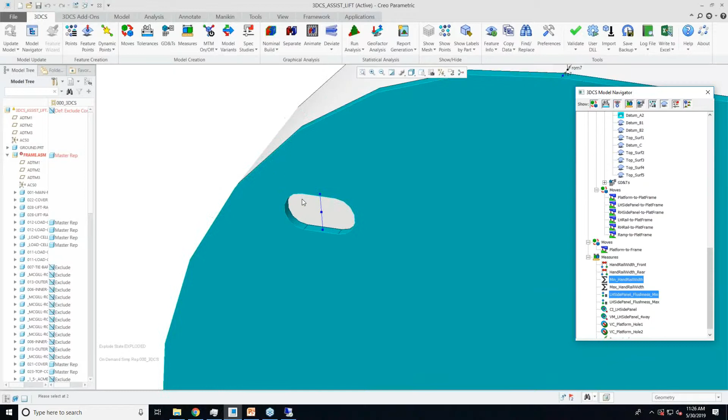All right, so that is the 2-point list measure. So now we've checked our flushness for our side panel. But one other thing about this side panel is it's got a nice 4-way control right here, nice tight hold to a bolt. And then if I go over here, I've got a slot going to a bolt in here, which is hidden. But we also have a lot of these clearance holes going around.

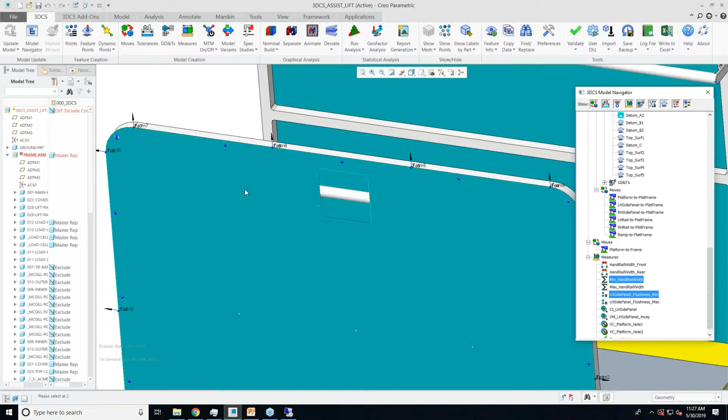And with how I envision my assist lift being assembled, I'm picturing that my assembler, to make his or her life easy, can just screw in and torque down this one over here and this one over here, and then worry about just sliding all these in real quick later. So I want to make sure that if he or she torques down these 2 bolts, they'll have enough clearance to make sure that an M6 bolt can get through these holes. So that's going to be our next objective with this analysis here.

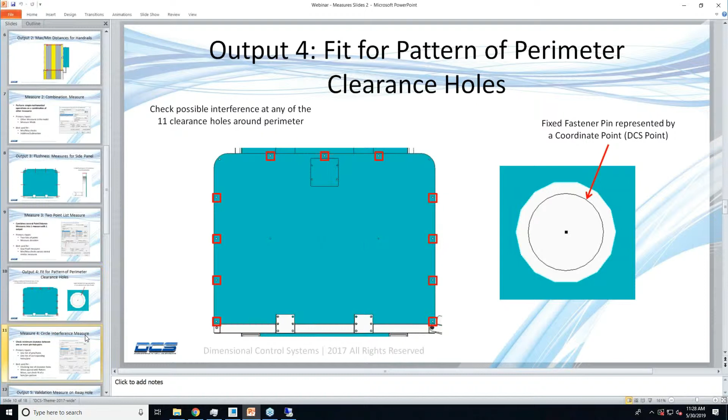So our output number 4, I want to check my pattern of perimeter clearance holes, to make sure there is enough clearance such that my M6 bolt is going to be able to fit through without adding any locating effect to my side panel here. So to do that, I'm going to use what's called a circle interference measure. And this is, I find, an incredibly common measure in 3DCS. I'm using this one all the time. And its best use is checking the minimum clearance between 1 or more pin and hole pairs.

So much like the 2-point list measure, I'm taking a list of object points and a list of target points. Again, they have to match exactly. And again, I want these to correspond across. I don't want these to cross at all, or else it's measuring from pin 1 to hole 2, and pin 1's probably not going to get into hole 2. It's probably not how this is going to work out.

So my primary inputs are just one list of the pins and holes, and then a second list of the corresponding holes or pins. And these are going to be best used for checking the size of clearance holes. And when paired with the pattern move, it can actually check where the pattern move is kind of falling out of spec, where it's having a tough time solving. In this case, I did not pair it with a pattern move because, as I mentioned, I don't want these pins and holes to be doing any locating. I want my 4-way and my 2-way doing the locating.

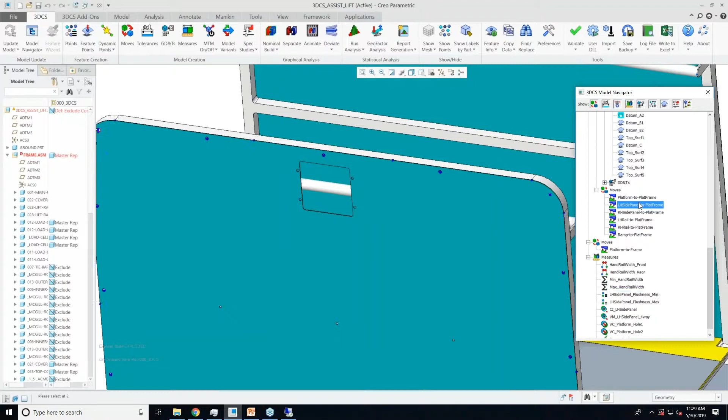So in this case, I have my side panel moving to my platform, only using my 4-way over here. You can see I've got those 2 arrows over there. Then I have the 1 down arrow over here representing my 2-way. But now I want to check all of those other holes that I have in here to make sure those fit.

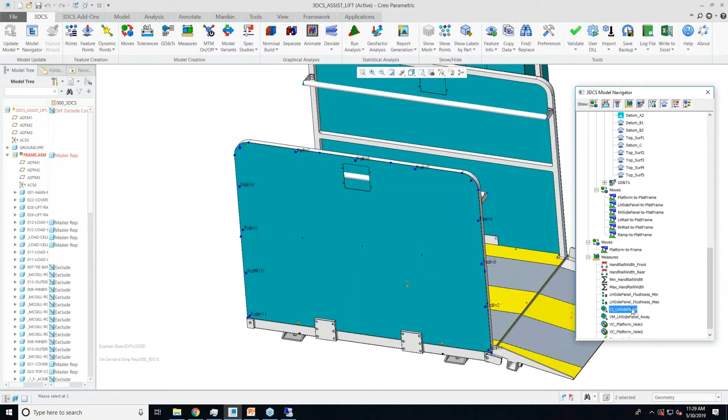So I've added a circle interference measure. And when I highlight that one, you'll see that all those points are highlighting, and it's telling me I'm measuring from this one to this one. So I have a from 2, 2, 2, from 3, 3, 3, and that's what all those letters are saying. That might be kind of challenging to read. So for this measure again, it takes a group of objects here and then a corresponding group of targets.

And one important note is it doesn't matter if you put your hole in object or pin in object, as long as the corresponding thing across from it is going to be that corresponding hole or pin. So I've got to have all pins over here and all holes over here, or all holes over here and all pins over here. I'm pretty sure you could even mix and match them. I wouldn't recommend that. That sounds like a bookkeeping nightmare. But you could if you wanted to. The measure is going to allow you to do that.

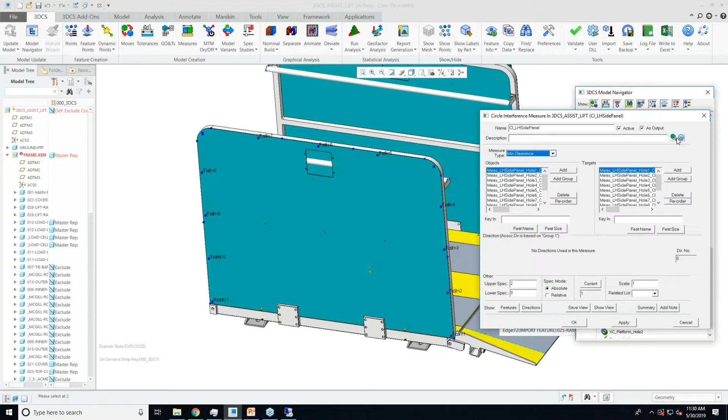And so the most common type you're going to use for measure type is going to be min clearance. Similarly, we do have other options here. Max clearance is going to return to you, it's not a maximum value of clearance that you're seeing between one pin and one hole. It's like, I'll just go to the help manual and that'll give us an image of what I'm talking about here.

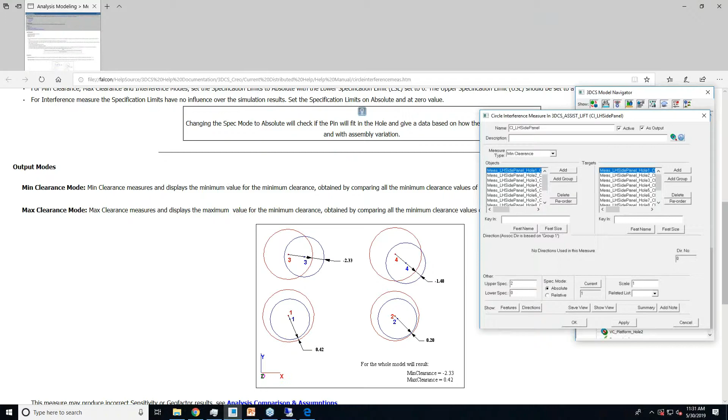So it's interesting, you did just cover something that I wanted to mention: in all of our measurements, you hit the button, I couldn't see it. Yes. But every dialog box has a button that will go directly to that area in the help. And so that's what he did. So for this circle interference measure, I clicked on this button right here, which has a little help icon as well as a circle interference measure icon. If you're in CATIA, it's not going to have this little question mark here. It's only going to have this icon right here, but it's going to be in the same spot in this MTM.

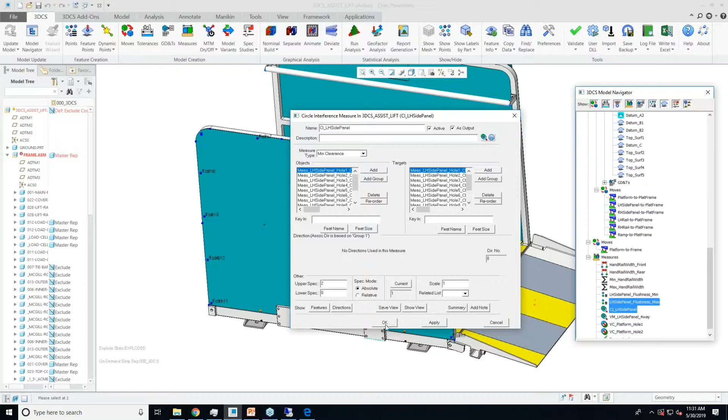If I click OK on this one, I can go to the point distance one. See, same spot, same icon idea. So if you just click on that for any of your Moves, MTMs, tolerances, or measures, it'll take you right to it.

And so then in the help file, I have this image here, which is best used to explain what max clearance mode is. So for each of my pin-hole pairs, 3DCS is measuring the minimum clearance between those two. So for pin 1, hole 1, I have 0.42 millimeters of clearance. For pin 3, hole 3, I have 2.33 millimeters of interference, so negative clearance.

What the min clearance option is going to give you is the minimum number that it saw for all of your pairs here, and what max clearance is going to tell you is the maximum number that it saw for each of your pairs here. So, and this is one build that you're looking at. Yeah, exactly. So it's going to do that every build. This particular build, the max clearance is the 0.42, and the min clearance is the interference.

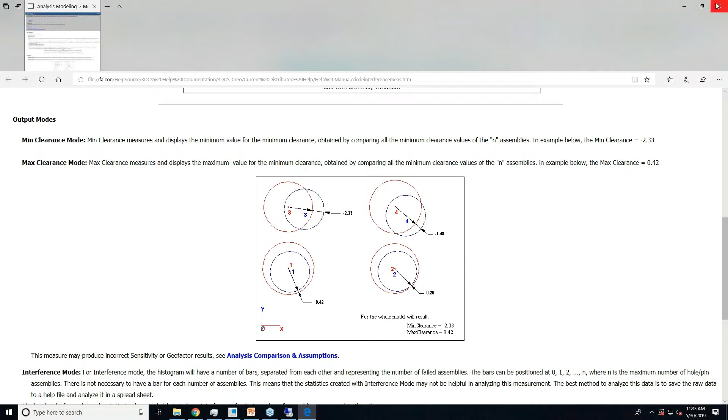Yep. So it's not returning to you any of these like max clearances. Like if you wanted to say, well, I've got my min clearance over here, what's my maximum clearance, to be kind of the opposite of it. Okay. So use kind of the opposite of it. But so that's what the max clearance mode is, and we're going to go back to our model right now.

And so that's the circular interference measure. If I go ahead and I build this, and once again we have this current button. So at nominal, I have 1 millimeter of clearance between that pin when that pin is centered in that hole. But if I start deviating, we'll see this number is never going to get greater than 1, because there's always going to be somewhere where the pin is shifted such that there's going to be a less than nominal clearance. And sometimes I'm even seeing that I have some interference here.

So if I ran my analysis, I could find out how much interference I'm seeing, and could either change the positional tolerance or change the nominal clearance hole size to get rid of this interference I'm seeing, since this is out of spec. And it's key to note that, if you saw from the help picture, this is a radial measurement. So if you get an interference of 0.2, to solve that, you would have to make your hole bigger by 0.4. Yep. Diametrically. Yep.

And I guess last thing to point out here is whenever you're using the circular interference measure and you're checking for interference, just make sure you change your spec mode to absolute and set your lower spec to be 0. Upper spec isn't too concerning at that point, because you can never have too much minimum clearance between a pin and a hole unless you're trying to figure out what size washer to use. And this is a common error that you don't get until you run your results.

So we were even talking, and it might be in our database, to try to change the default for circular interference and virtual condition to absolute. Actually, for all measures, the default should be absolute, because if a measure is referenced in another measure or move or tolerance, you want those spec limits to be absolute. That's probably why your in-spec wasn't working earlier.

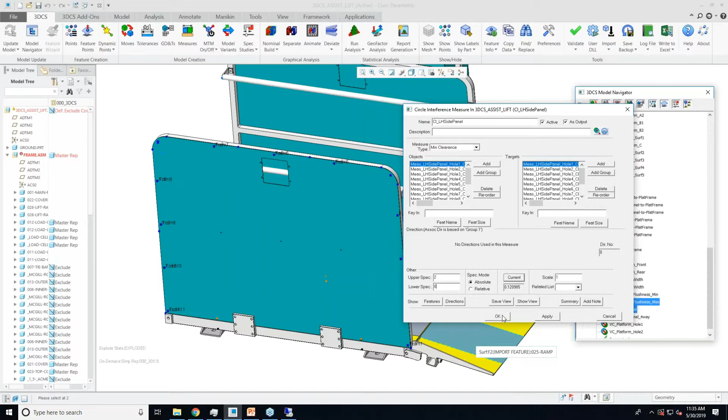Yeah. So if you're doing a simple model where each measure stands by itself, relative is fine. But if you're using the combination measure or measure equation, or if you're referencing a measure in the conditional logic or interference logic fields of a move, you want that spec limit to be absolute.

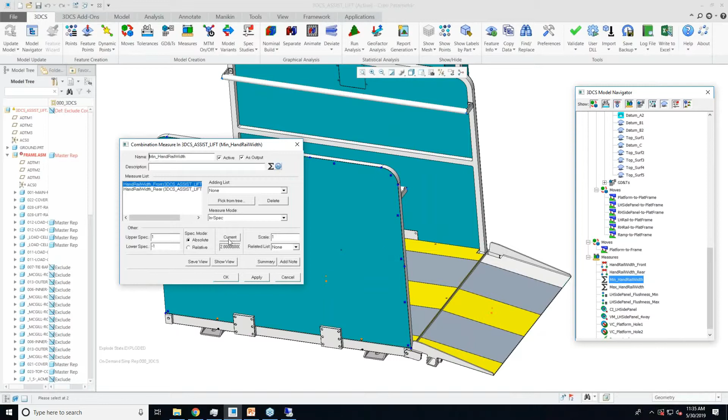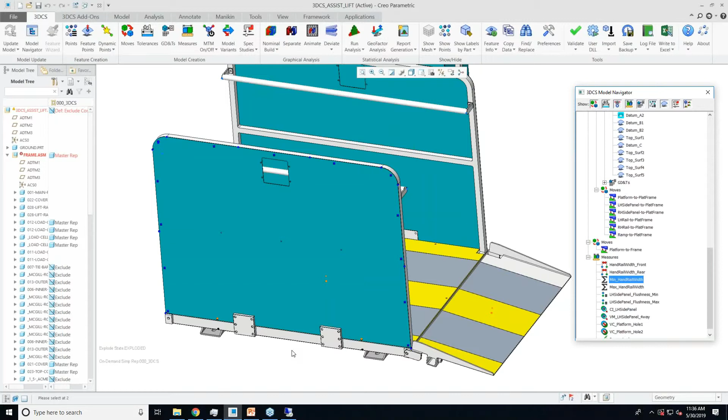And then how does circle interference work with floating? When floating is active or when floating is not active? So it's a good question. None of the pin-hole pairs that I used in my circle interference measure were used in a move, so none of them would have float involved in them. So the float is involved in the four-way, two-way, which is shifting the panel. Yes. And then the circle interference is just checking the other holes to make sure that once you sink your four-way, two-way screw, can you just randomly throw all the other screws in?

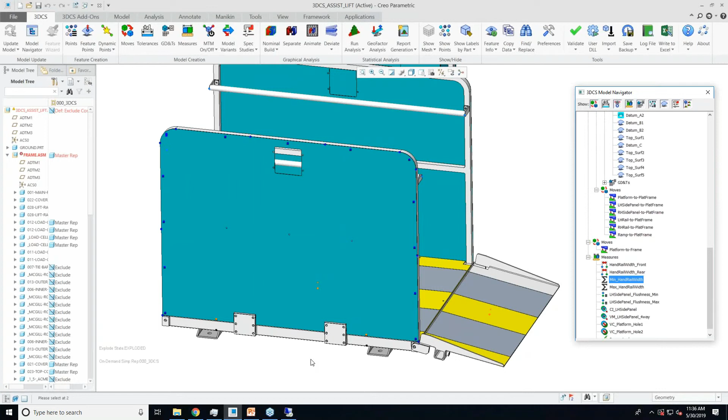Mm-hmm. So the idea, if you didn't have the four-way, two-way locators, then in the assembly document, it would say, please loose fit all screws first and then tighten them down. But with the four-way, two-way, you can sink those two screws and then randomly suck down all the other screws if this circle interference measure passes. Yes. Which is the goal of my design here. Right. The goal is not to have to loose fit all those screws before you suck them down.

Yep. I hate that with assembly instructions, because I never do that. And then the last screw doesn't fit. Maybe I should have done that, but... Right.